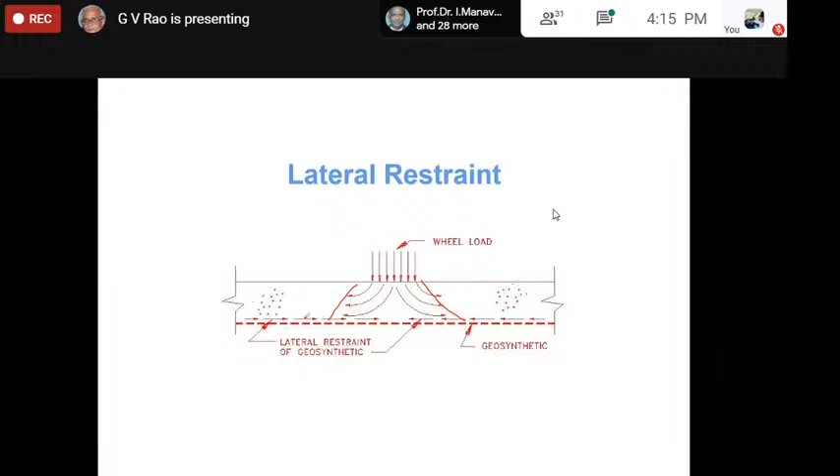It will generate a friction actually. So by generating friction, it's like the other way around. It's giving a lateral restraint on the system now. That is most important.

That means the soil which is made, some granular soil, is being confined to this area just below the foundation or the load, as the matter was. So that load, whatever compressive load is reached, now by virtue of the friction at the interface. So that is the cause for all our efforts.

Basically, we know that we are all dealing with compressive force only, but then by virtue of the attempted movement of the particles over the geosynthetic, naturally we are going to spread, we are going to cause a tension in the material. So this tension is going to cause lateral restraint. Otherwise, tension is not in the structure — it's all compressive loads only. So please remember that.

And also along the plane of the material, there's a drainage function. Of course, if it's a strong geotextile, like a woven geotextile or a geogrid—we'll see more of geogrids later—it's going to give us much more lateral restraint. So this is the first hypothesis placed before us to understand in what manner the geosynthetic is going to work.

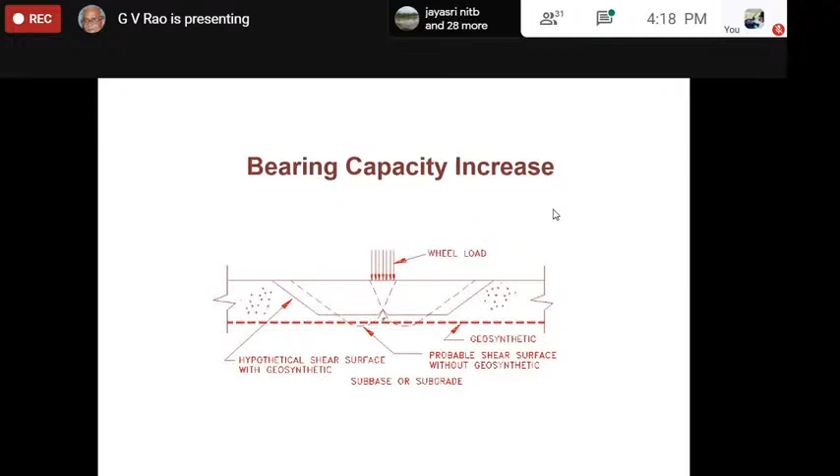And if by any chance there is more sinking also—the advantage of all of this is, well, in a pavement there's rutting, but here we're not talking about rutting. Earlier we just thought we had this kind of system. So if this is going to cause, let's say, settlement, which is naturally happening if the material itself is initially not capable of handling it, then by the process of having this curved shape, what's going to happen now?

The geosynthetic is going to expand, is going to extend. And once it extends, the actual strength of the geosynthetic comes into picture—its vertical component is going to act. This vertical component, which I am showing you, is going to resist the load. So this vertical component resisting the load means the pressure beneath the geosynthetic is going to reduce. That is a great thing.

Now this can happen if it's a pavement under two wheels, or if you have individual footings in a neighborhood—the entire thing is going to act as a membrane. That means between one column and another column, it will act like a tension member. That is the beauty of it.

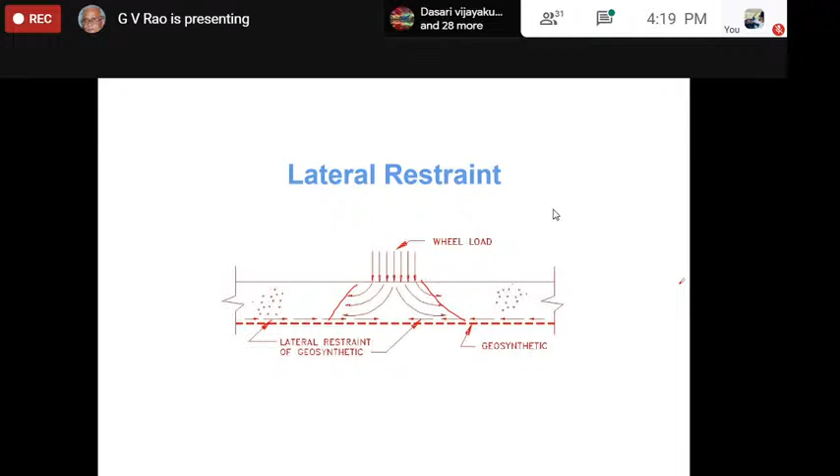Now, these are the three hypotheses which have been given out over many years, and these are hypotheses to understand this better. It's not possible for us to actually develop equations for this—there is no solution by these concepts alone. It helps us; that's why these are called the three fundamental hypotheses for why this strength increases.

Once that is there, what's going to happen? This embankment tends to move, and resistance is going to be there at the bottom. That is countered by placement of geosynthetic here. So the geosynthetic resists this movement, and this has been used well because the footing is subject to outward stress, and an inward stress is going to develop by virtue of the geosynthetic, and by the process of friction, as we thought in a normal case—like Vesic's case. I showed you Vesic's case earlier for how we considered bearing capacity of a rough foundation. So here, if you've got a grid, this is going to be taken as a very rough foundation.

So what's going to happen now? Our earlier bearing capacity factor NC was only 5.14, as I mentioned earlier. Now this keeps increasing. So that is the main thing which is going to happen now: the bearing capacity factor is going to increase.

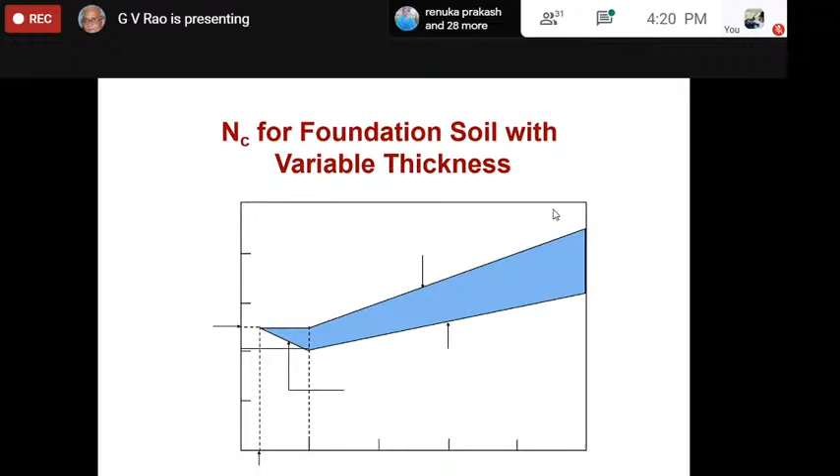This side is the bearing capacity factor now, and you can see that there is a continuous increase in the bearing capacity factors depending upon the shape, size and everything else. So by this process, we are going to think now.

We are not talking only of normal building foundations. I am talking of general foundation cases which are feasible to take up for ground improvement, without necessarily a change in the settlement. That's the first thing we are going to look at.

So once you look at that, what's going to happen if you start constructing very fast? The bearing capacity, the factor of safety against failure, is going to be obviously decreasing.

Initially it could be more than 1. It will keep decreasing - this is hypothetically shown - but it decreases to 1 and it fails also. And just before failure, if you stop it, what's going to happen now?

Naturally, the excess water pressure generated in the soft subsoil is going to slowly dissipate, maybe by virtue of a sand layer here or much below this. And what's going to happen? When the excess water pressure is dissipated, the soil itself is going to become stronger, so its value of strength is going to improve.

So what's likely to happen is the safety factor is likely to increase. On the other hand, if you place geosynthetic at the interface between embankment and soft soil, the factor of safety is not going to come down below 1. It will come down because the pore pressure has been generated, but then it will always remain more than 1.

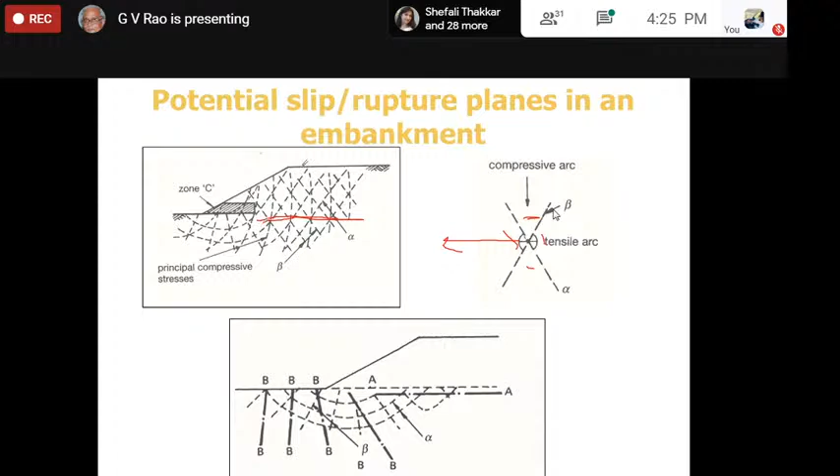So fundamentally, placing a reinforcement below at the interface horizontally is always going to help us a lot, as shown here. Then once the edge comes, these planes are going to move vertically, so we need reinforcement placed vertically. It's always possible to put a pile or something vertically, no worry at all, but you can't place it horizontally - this can only be done before construction.

We can also do this in cases where no technology was used but there's a failure we didn't anticipate. In India, we put a lot of ballies, poles, pipes, and they stabilize things. Fundamentally, away from the toe of the embankment we need reinforcement more or less vertically, and at the interface of the soft soil and embankment we need horizontal reinforcement. That is the most ideal state by theory also, and that is what we are trying to do.

So we can see some examples of a geogrid and how it functions. A lot of workers have done work on this, quite a bit of work. Professor Madhav has shown you work by Binquet, which essentially used metallic strips. Professor Das and his co-workers have done extensive work on placement of geogrids and how it influences bearing capacity. In all cases, the bearing capacity improves.

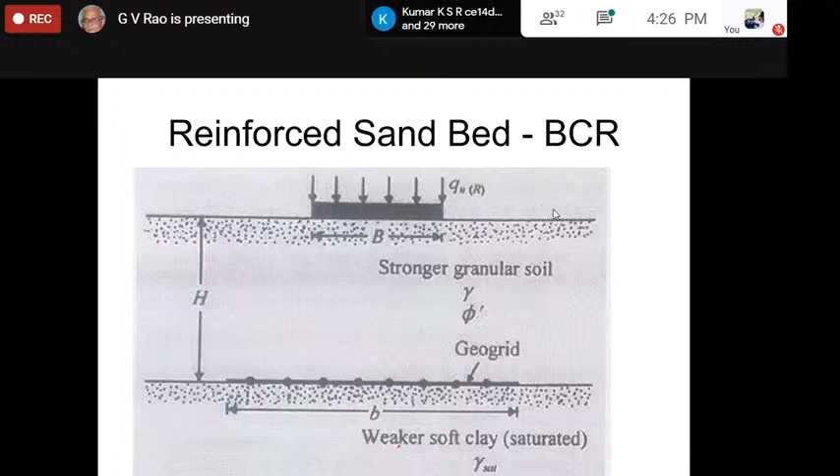We are not touching upon settlement here - if you want to consider settlement, there's a different way, we'll see that a bit later. So what happens in this case: we can place geosynthetic as a first level at the interface between soft soil and the stronger granular soil, which is the usual fashion, and by this placement a lot of theories can be worked out exactly like our classical theories.

What you find is that the zone of failure in the stronger granular layer is normally going to go like this. Once you place this geosynthetic, or stronger material in general, the zone doesn't necessarily have to be strong now, because of the influence of the stronger granular layer. So how do we make it stronger? Naturally by placement of a geosynthetic at the interface, or within the granular material also - this improves the same material further using a geosynthetic.

Before we go into that, one classic example was done by Professor Lee long ago, almost three decades back. He did a wonderful experiment using triaxial testing in the laboratory - using sand at very low confining pressure, and conducted a triaxial test. On the x-axis we find strain in percentage, on the y-axis the total axial stress, sigma 1. Using normal sand, if you conduct the test, this is the kind of stress-strain curve we got.

On the same kind of sand, at the same density, he used wood waste, wood shavings, the kind our carpenter gets when he wants to plane wood. Those wood chips are very thin, about 0.008 inches in thickness, 0.05 inches in width, and 1 to 3 inches in length. Just 1.2% by weight of this waste material was placed in the sand specimen.

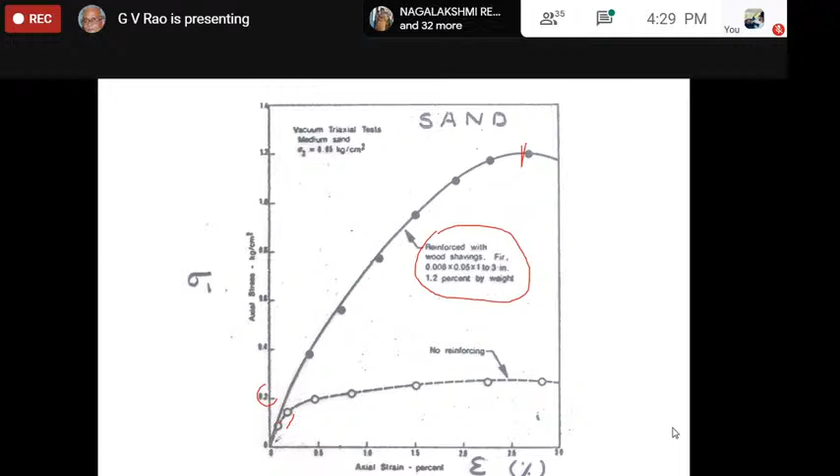And then he got this kind of curve, one of the most wonderful pictures I always remember classically. This picture shows three things. In this case, it is a loose kind of sand, and in this case it behaves almost like a dense sand. The peak value here is almost 1.2 kilograms per centimeter square, whereas here there is no peak at all, it's almost flat, about 0.2. So the increase in strength is 5 to 6 times the peak strength improving. And here it reaches a residual state, while here it's still around the peak only. And the slope, the stiffness of this, is also improved. So three things happen: the peak strength is definitely higher, the residual strength is much higher than the peak of the unreinforced material, and the initial slope, the elastic modulus, is much higher in a reinforced system.

And by using any kind of material, it can be this kind of waste, any kind of waste. And mind you, when we place the waste, it actually becomes a kind of isotropic behavior, because we are placing everything differently.

On the other hand, our students at IIT long ago did a lot of project work on this subject. In this case, we took local sand and tests were done at a smaller scale, 37 mm diameter samples and later 100 mm diameter specimens. We placed discs the same diameter as the specimen, up to 8 of them, and tested at many confining pressures.

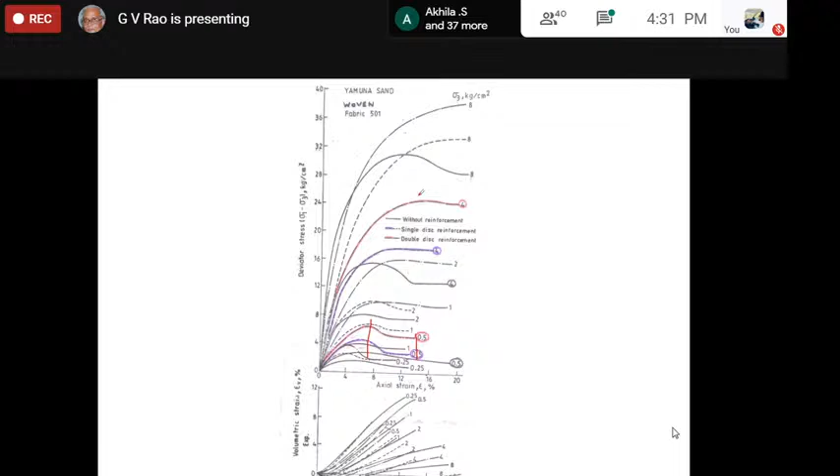If you keep on adding, the initial effect is always more. That means placement of one or two is going to be more effective than placement of a number of them. A lot of results must have been shown by Professor Madhav also to you, about where to place it. If you place this adjacent, very near the foundation, naturally the effect is much more. So when you try to summarize all the results in this case, this is a very interesting picture.

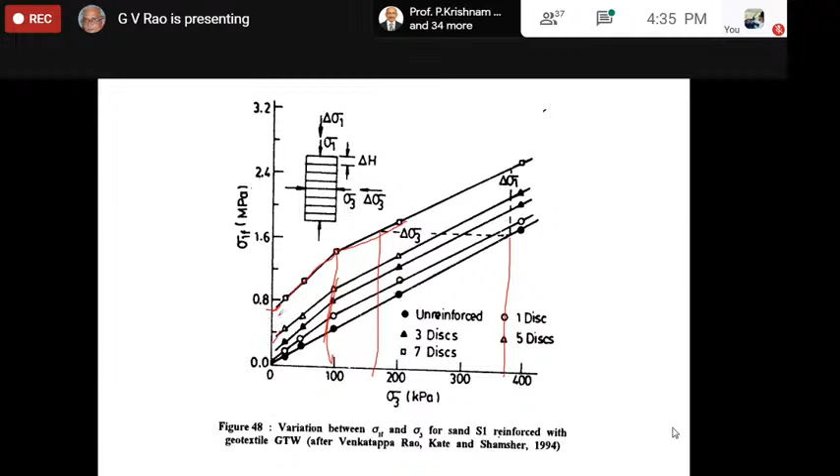A lot of our students have done this work, and we have published many papers on it. For any case you pick, this is what happens with geotextile, geogrid, or with small cut pieces of material - all of them show the same behavior. Similar work has been done with micro mesh also, where we take geonet and cut it into pieces of different lengths. The same general behavior forms.

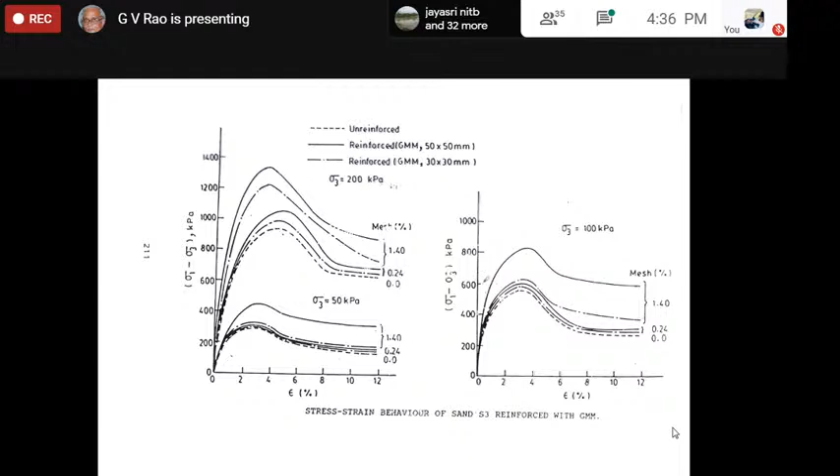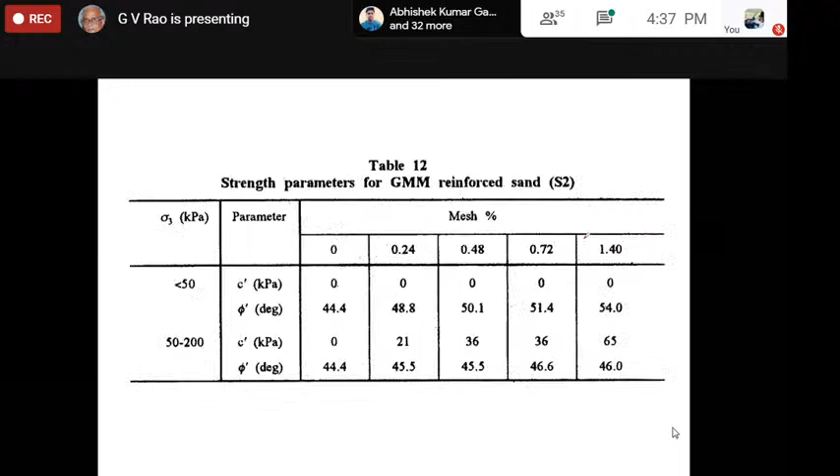So both are different in the direction now. It's all based upon what you define as critical confinement pressure. This is just to illustrate the phenomena. A lot of results are published, and then we asked, what is the use of publishing all this information unless it's related to actual conditions.

So we took some theoretical models in which we said, okay, we have a clay of known strength, and then we put a foundation of width B, at a depth df, and a sand layer of thickness h, and this is what we replace. In this case, it's normal sand compared to the geogrid micro mesh reinforced sand.

So if you try to look at that and compare the bearing capacity values obtained by bilinear theory, by double layer theory, we can calculate the bearing capacity of this reinforced bed, and also calculate the bearing capacity without reinforcement, that means just sand only. If you put a ratio of these two, bearing capacity with reinforcement to bearing capacity without reinforcement, we find that for a mesh of 1.4%, this value is increasing significantly.

Obviously, the higher the h, that means if h is more than 2b, the influence is very high. And if h is less, naturally the influence is not much. If the percentage of this mesh is 0.24%, the value is almost 1.5, this is 3. So the point is, even at a very small percentage, 0.24%, we find improvement of the order of 2 to 3, and maximum is around 3.

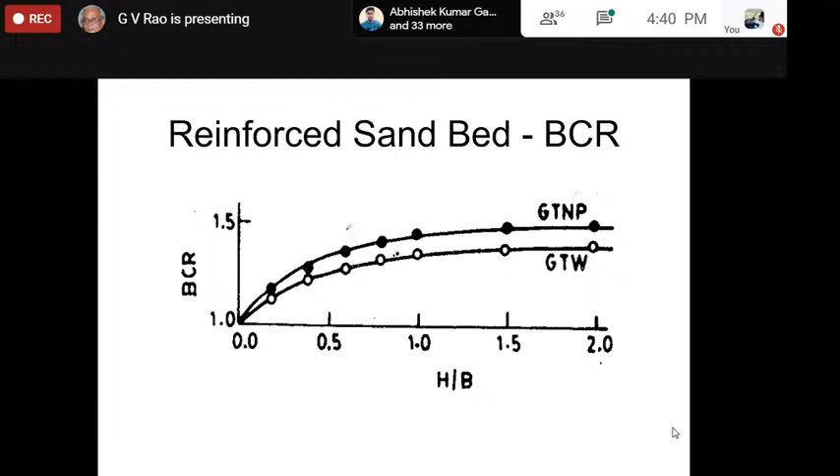That is the kind of thing you would suspect. Whatever you place will always improve like this. There are different kinds of calculations we have done based upon actual results. Earlier, we placed non-reinforced style and reinforced style, and compared them with respect to experiments and with respect to theory. All these studies were done and published very well.

Another way we try to calculate is using a granular trench, using the theory initially initiated by Professor Madhav long back. We use the same model, but now instead of only granular material, we have a reinforced granular material, like an interaction test, placed in weak clay. We find the bearing capacity ratio on this side, and H over B, where H is the diameter of the granular trench, and B is the width of the foundation or load area. H more means H over B is more, up to 2.

So then we also calculate what is the likely settlement of this. We did all this now. Settlement is not going to change significantly. So once you do the settlement also, we find that actually the settlement does decrease from this value to this value, but definitely not as much as one would expect. It's not as dramatic as expected.

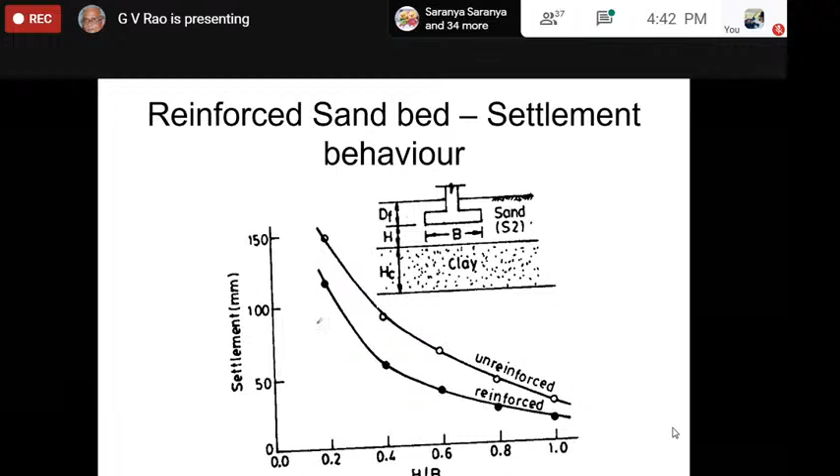For a given case, let us say the settlement reduction is hardly 15-20 millimeters in a range of 150 millimeters. Here also it is decreasing slightly when H is going to be more, because domination is done by the H reinforced here. And we calculate like this for other materials also. In this case, again, we got a different kind of sand, and we find slightly more difference. But definitely it's not decreasing from 150 to 50. It's always going to be a very small percentage settlement.

So what we want to say out of all these calculations, made based on the fundamental parameters of the clay, based upon the frictional values of the whole thing, and based upon the theory used to calculate bearing capacity, we find that it does influence the bearing capacity by at least 2 up to 3 times, depending upon many factors. And then the settlement, calculated conventionally, is not influenced so much; not very much influence is there. It's also shown by a lot of work done by Professor Madhav himself.

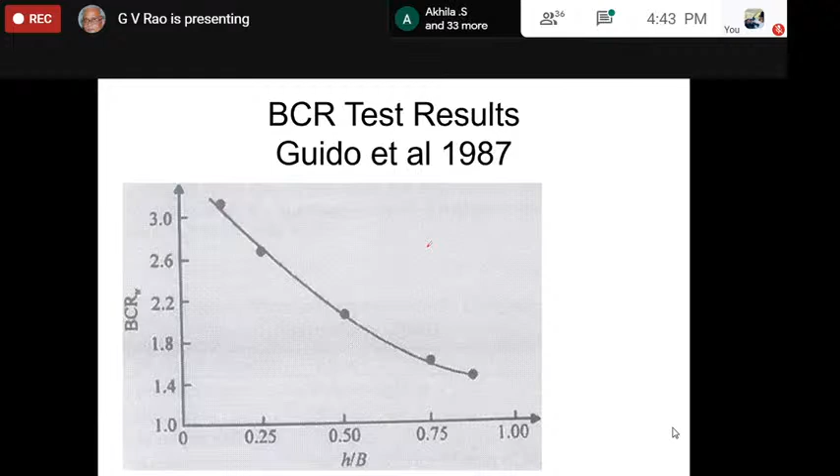And the work by Guido et al 87, also shows similar kind of results. It all depends upon the kind of sand, the kind of clay you have, the kind of GeoGrid you have. So the influence is very significant in trying to change the bearing capacity. This is definitely taken for granted.

So different kinds of geogrids again. Influence is more with SS1, a higher, stronger geogrid. Influence is less with a weaker geogrid. So these are all classical results I am trying to show you, along with our own students' work.

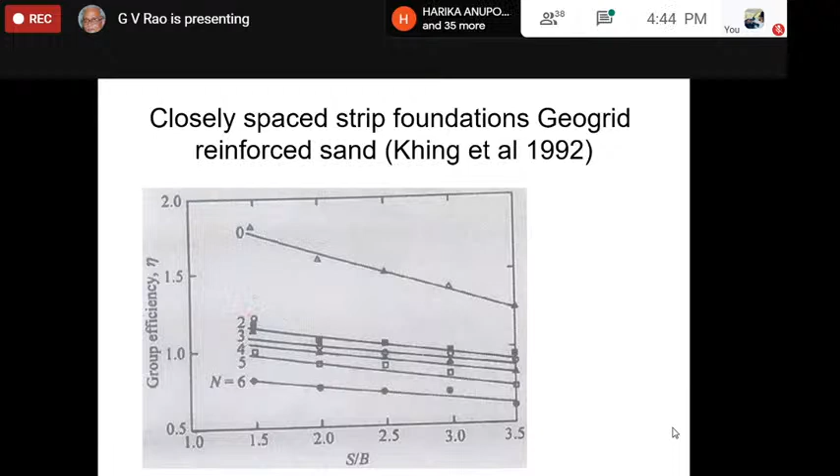So when they close the spacing, which I showed earlier, you find the group efficiency of many of them - we find that when n is equal to 6, the influence is felt less. Efficiency comes down. So by placing them so closely, so many of them, it's not going to influence it so much. And that is what you have to always keep in mind: just because you like having more of them, doesn't mean the benefit is going to be as much.

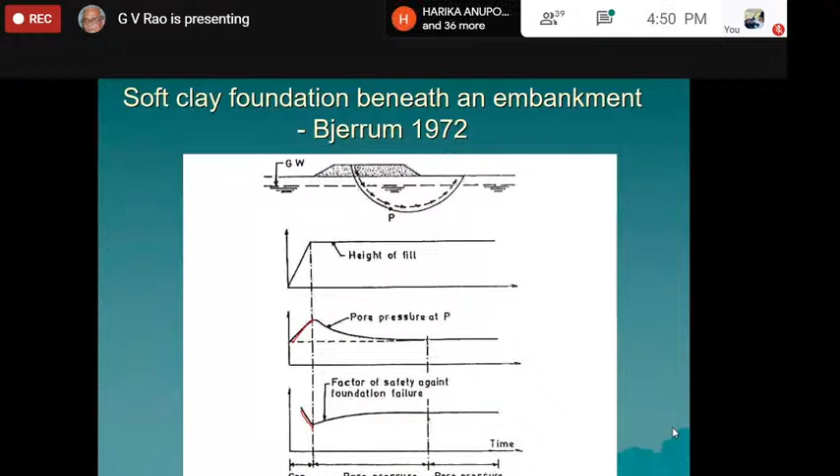Once you stop, slowly the pore pressure dissipates, so the factor of safety increases. That means you have to do slow construction. Slow construction gives time for pore pressure to dissipate, but this slows down the whole construction process. We can't afford that to happen, so we place a geosynthetic.

Now, if you construct very fast, the embankment is going to settle, or tend to fail. What are the conventional ways in which you can address this? You can improve the ground.

One way is you can mix some lime. A lot of reports are available in the literature; we have done one such study, published by the Indore Congress in the year 2000. Then we can use stone columns, which I'm sure has been covered by Professor Madhav. And then consolidation with sand drains, which must also have been covered, but these sand drains have their difficulties.

We can also use a geosynthetic prefabricated vertical drain, which functions exactly like a sand drain and performs well, accelerating consolidation under loading. So PVDs are part of geosynthetic materials, using the functions of both filtration and drainage. But we don't have time to deal with it now, we'll cover something else.

Another way to enable fast construction is to use reinforcement at the interface, which we call basal reinforcement. What are we trying to do? We are trying to achieve bearing capacity improvement, not addressing settlement. The structure must be able to tolerate some settlement. That's why we don't call it foundation improvement, we always call it bearing capacity improvement.

So we'll look at what the problem is, how we analyze and design, and what the requirements of the geosynthetics are, along with typical case studies. It is always a geotechnical problem. Geosynthetics aid the civil engineer, but we must still follow all the fundamentals of geotechnical engineering before going to the next step.

This is exactly what we want to prevent. Construction of embankments on soft ground can lead to deep-seated foundation failure or excessive settlements. We're not talking about settlements here, we're talking about how to prevent these kinds of failures, deep-seated or shallow, we want to prevent them.

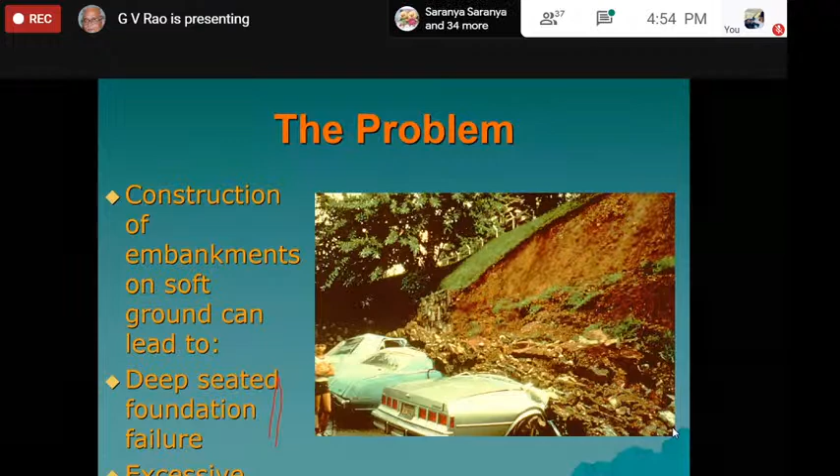This is an excellent illustration, provided by the International Geosynthetics Society, showing the whole embankment coming down, and the adjacent soil actually going up and then falling. This is a very classical failure.

The solution to this problem can be approached in many ways. Conventionally, we can think of removing the soft material and replacing it with quality fill. Obviously, this practice was possible maybe a decade or two back. Today, where do we put the soil? We have to carry this soil away, and where is better soil available? We are not being allowed to pick up soil indiscriminately.

There is a lot of control by environmental authorities to not open more quarries and not to transport these materials. So the question of removal and replacement is not going to happen, nor displacement of soft material.

Earlier we used to have some kind of blasting technique, by which the soft soil would naturally jump out, but that causes a lot of other issues, again pollution and things like this. So that is again not a feasible practice today. Piling, obviously, can be done, but that is likely to be more expensive.

Then there's stage construction, meaning you construct a meter or so, allow some time for the pore pressure to dissipate, and then keep doing it. If we want to consider 10 meters of height, it will take 10 months also, or maybe more. So stage construction is not feasible in today's environment, both socially and politically.

Everybody wants to finish structures as fast as possible, so you can use the road, building, structure, or bridge. Then we can have a toe berm. In the case I illustrated, there's no space to construct it because we can't acquire as much land as needed, since a toe berm requires additional land. Normally the land acquisition has taken place beforehand only, so today if we say for safety's sake we want more berm, where is the land available? That also is an issue.

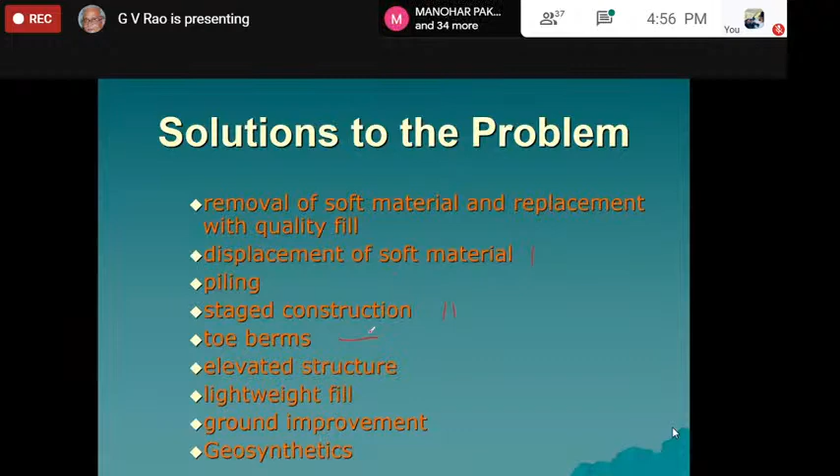Then of course there's the elevated structure. This is a good option in one way, like our bullet train, because of the soil and rock conditions, they decided the entire 550 kilometer length is going to be elevated only, viaduct only. Obviously, the cost of the entire structure is 4 to 5 times that of a constructed embankment. So look at the kind of situation they're going to face now. Elevated structure is a very good option, piling is a very good option, but these will definitely add cost, not necessarily cost effective.

The other option could be lightweight fill, meaning we remove the soil and replace it partly with lightweight material like polystyrene blocks, thermocol blocks, which are available now, and part of the fill is also constructed normally. In India, we have not started doing this, and abroad it also has not commonly been done. Yes, some trials have been made and they're successful, but with the prevalence of rodents and things like this, we are not very sure whether this will work in our country or not.

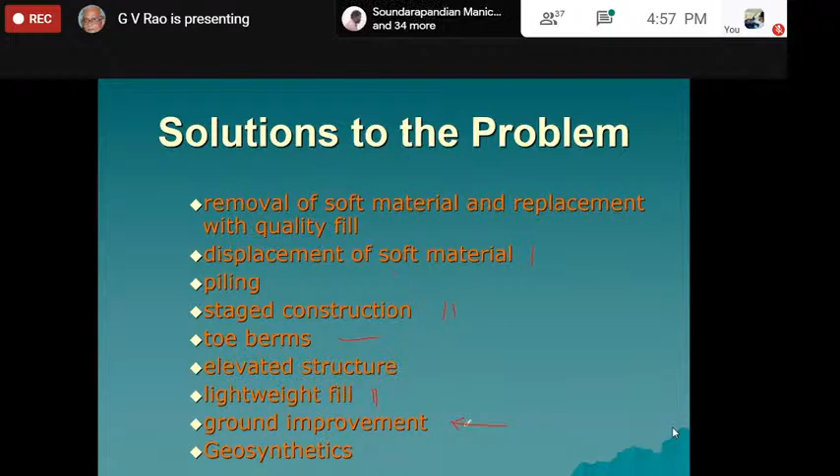Then there's ground improvement. What kind of ground improvement can you do? Because the soil involved is going to be very deep, very thick. So something like a stone column can be done, definitely a very good alternative. Again, in the case I am considering, stones are not available nearby and they are not cheap either, so availability of stones is an issue. And PVDs, as I told you, will take more time.

So the other alternative which can be thought of is the geosynthetic alternative. What I'm trying to say is that the engineer or designer in charge has to look at all the options. For example, the possible options here are piling, toe berm, stage construction, some kind of ground improvement, or geosynthetics. Out of these four feasible options, naturally you have to do some preliminary design, work out the costing, and then decide what is best.

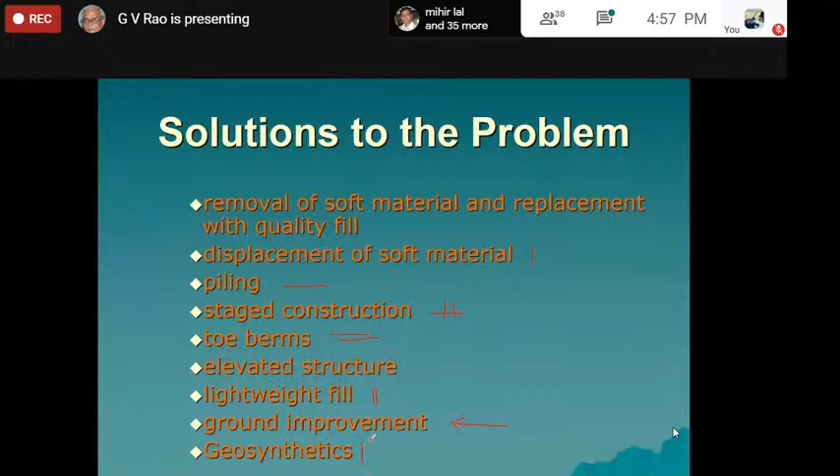So just because we succeed in doing a geosynthetic reinforced embankment, it doesn't mean that it's always going to be the right answer, always going to be correct. Geosynthetics in this case generally provided a structurally sound solution at lower cost and definitely faster than traditional methods.

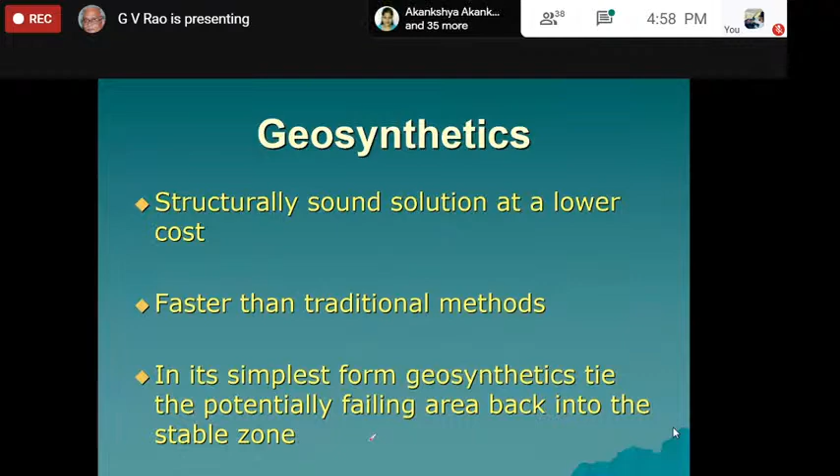In a way, what happens is that if the soft soil is trying to move away, it is being held together and held back underneath the embankment. That is the beauty of the entire thing. The block is being held back now. So typically it's something like this.

So we have an embankment, as shown in the diagram. We can place a number of these layers, or just one layer at the interface, or one or two below in the soft soil, or also in the embankment. It's up to you. Then we can do the same kind of stability analysis.

You would have found out the stability of the slope earlier and found that the factor of safety is less than normally 1.25 or 1.3 as desired, in which case you can place one or more layers of the geosynthetic and recalculate. Study the factor of safety with typical failure conditions, and by a number of trials arrive at the minimum factor of safety.

So in all these cases, we'll see what conditions you have to check, but there is always a slope stability analysis done. In the simplest way, what is happening here?

If this entire block is going to come out, naturally the geogrid or geosynthetic here will also be pulled out. So if it has got that much resistance between the geosynthetic and the soil, that is going to prevent it from coming out. That means it's going to give you additional tension load, which will be added to the analysis.

Most of the software are capable of doing this kind of function. We have ReSSA, which is available. We have SLOPE/W. Many softwares allow you to do this kind of work.

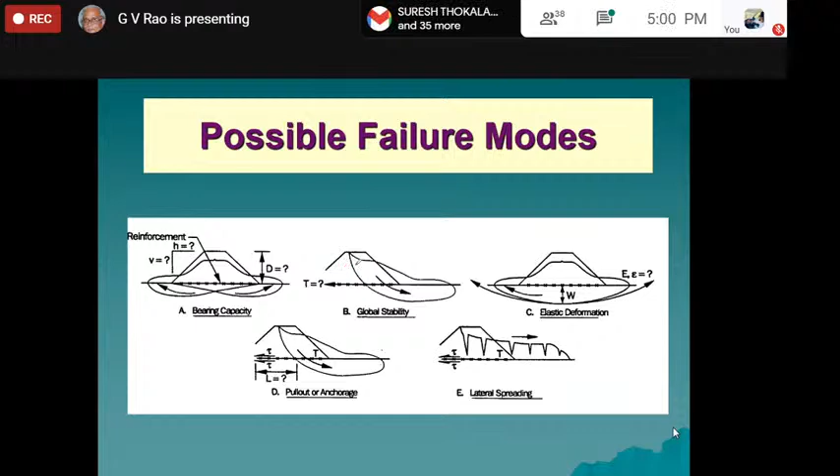I have shown you this already. So the kind of things we are going to do will be analyze bearing capacity, analyze global stability, analyze deformation, pull out anchorage, and lateral spreading. All of them we had analyzed. These are going to be exactly the same analysis you would do for a normal embankment on soft soil.

Mind you, not replacing soil - we have seen this. One important thing before we go further is that in this case, the embankment is going to fail across the embankment, not along it. So you see in this case, the reinforcement is placed across it.

That's why the unrolling is done in that direction. So the geosynthetic we place should have more strength in this lateral or cross direction, and not in the longitudinal direction. That means if it's a geogrid, it's going to be a uniaxial kind of geogrid and not biaxial. The high tensile strength is required to maintain stability and prevent failure.

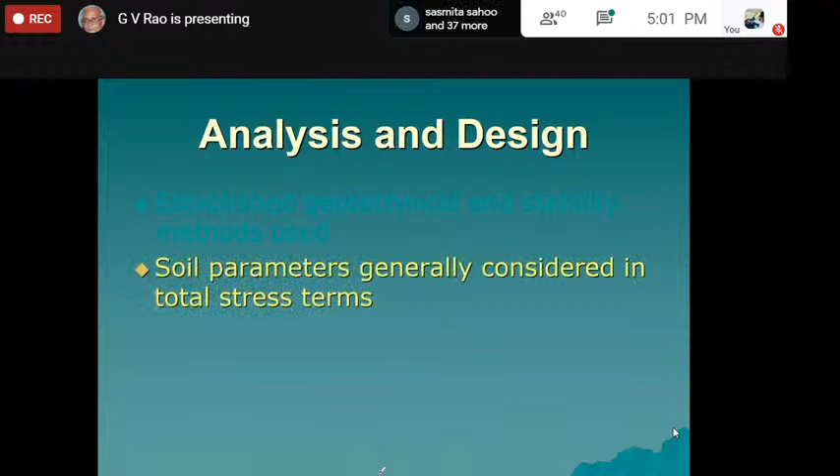As the foundation shear stress or strength is increased, the required geosynthetic tensile force reduces, which is good for us. The analysis is as mentioned, by the traditional methods only. For soil parameters, we initially always consider total stress parameters. So we analyze for rotational stability, lateral sliding, and bearing capacity.

When trying to do this, as I already mentioned, you can see a typical embankment, and we understand the nature of the soft soil - some parameters. We also know what the soil parameters are for the embankment. One more thing we have to be clear about is that usually when constructing, contractors take the soil from the neighborhood only and dump it here.

So if the contractor takes the soil from around here and dumps it, naturally that becomes a ditch during monsoon. So the height of this embankment is not going to be this much alone - the effective depth is also going to increase to this level. This is what we have to watch for.

You remember whenever you travel by train in monsoon, on either side of the track we have ditches parallel to the track. These are ditches created during construction only. So one has to avoid this.

Once this entire block is supposed to move, or by our analysis of stability, what's going to happen?

It is going to be the tension along this geosynthetic which is going to come into picture now, and we have ways of determining the friction developed here. The tension is going to act normal to this, and we take the component along and tangential to the assumed failure surface. So all of this is exactly the same thing now.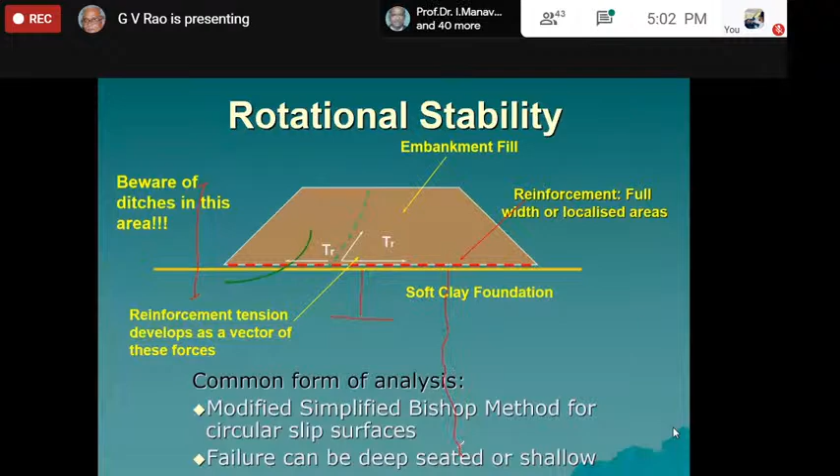We can use basically the modified Bishop's method, simplified method for circular slip surfaces, and there are two ways to handle this. One way is that the thickness of the soft soil is limited. Another case is that the thickness is quite large. So the basic theory applies in both cases, but there's a slight difference in analysis.

What may happen is that blocks at the toe edge may start slipping away. If they are slipping away, what is preventing it? It is only the friction, the interface friction between the geosynthetic and the embankment soil, which is going to prevent this. The active pressure is going to act upon this, causing it to move away.

The friction is the cause for the tension being created, so naturally it is this resistance which is taken into consideration. For friction, we need to conduct a laboratory test to find out the pull-out value and modified shear value, and then see appropriately what results. Ultimately, we are calculating the tensile strength, the active pressure, and then seeing whether the friction is sufficient to prevent the outward lateral movement.

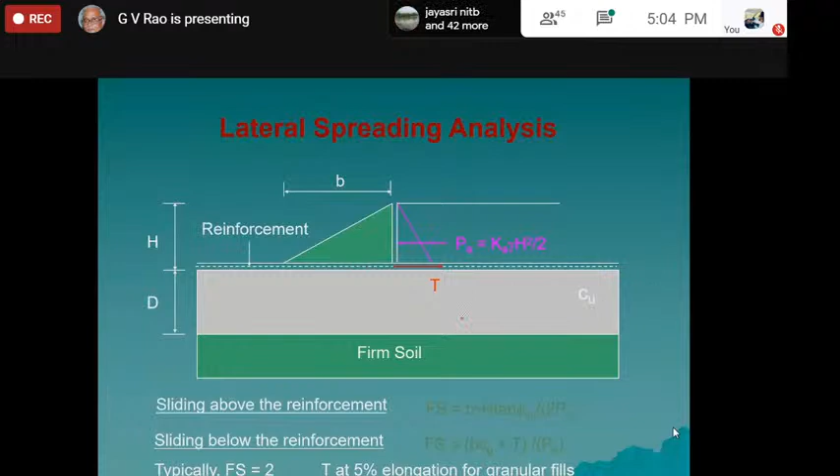The other critical thing in the case of relatively small thickness compared to the width of the embankment - assuming this is a small thickness compared to the base - is that it's possible for this entire thing to be squeezed out.

How to prevent this squeezing out is by considering a block. This block is going to move out again by virtue of the pressure acting upon it. So we consider the friction between the clay and the bottom of the geosynthetic, and the friction between this clay and the firm soil below.

That is why we are trying to minimize the sliding, and naturally in this entire process there will be tension developed. That means the tension developed should be within the limits of the vertical strain that are allowed. That also is important, and that is another way of looking at this.

It's called boundary extrusion - loosely speaking, the friction here is allowing this block to stay in place. In a loose way, we say the block is not being allowed to move, it's being tied back to the bottom of the embankment. That's called extrusion prevention. It's a beautiful concept developed by the Tensar Corporation, based on their theoretical work and a lot of field studies.

We have ways of analyzing the stress distribution resulting from all these forces. Once a geosynthetic is placed, and geocells also, the stress distribution is going to change. That change in stress distribution, because we reinforce the entire area, is detailed in the British code, which we followed in the case study as we go further.

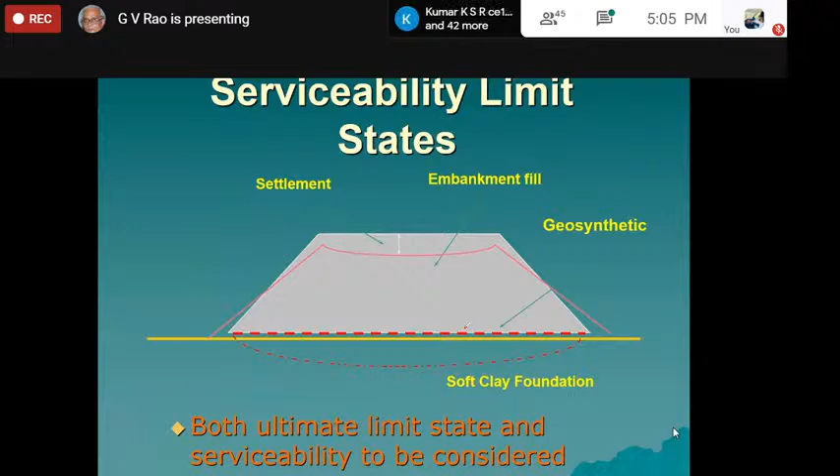Then, of course, there's the serviceability limit - we need to consider how much settlement will occur and whether it can be allowed. Obviously, this is a question the client has to address. When we provide these designs, we are not controlling the settlement; we calculate settlement in the usual way and indicate to the client what is going to happen.

So the requirements of the geosynthetic can definitely include high tensile strength in the roll direction, ability to carry load for several years - since consolidation is still going on - and ability to transfer load from soil to geosynthetic by friction if it's a geotextile, or by interlock if it's a geogrid.

So these are two things that are going to be there. And then, of course, it should not be damaged during construction. So that also we have to consider in determining the allowable tensile strength of the material. And then during construction, obviously, it should not be exposed too long. Sometimes there are construction issues between the client and contractor, and if it is exposed too long, there is a problem of degradation of the geosynthetic also. So in that case you have to protect it. That's all what we have to do.

And the materials we are looking at are going to be either high density polyethylene or, of course, polyester. And in both cases, naturally, these are not degradable from a biological viewpoint. So that is what we have to keep in mind.

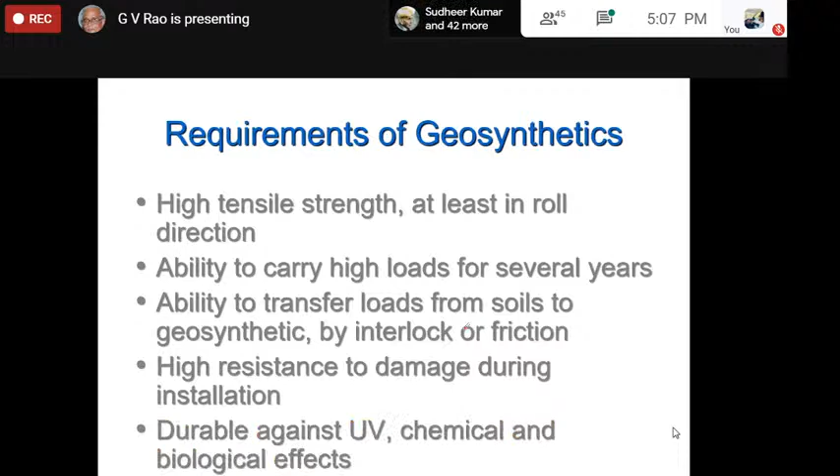And extruded grids, which I am going to show in a big way. And then there are also welded grids that are possible. So these are what is there in this case.

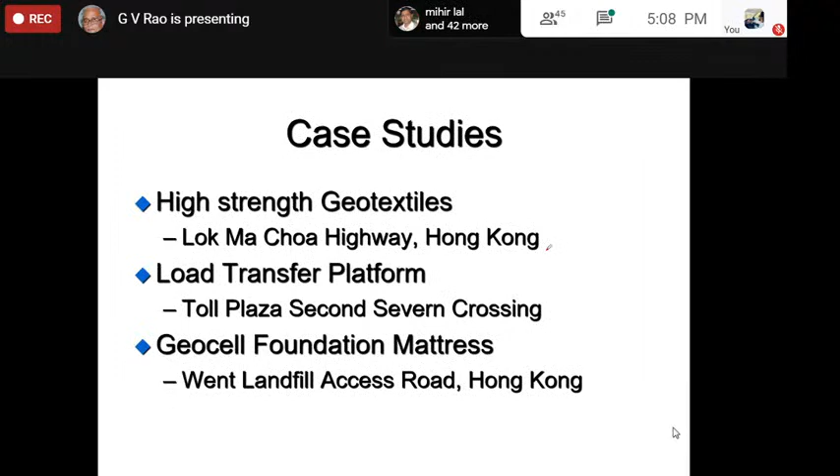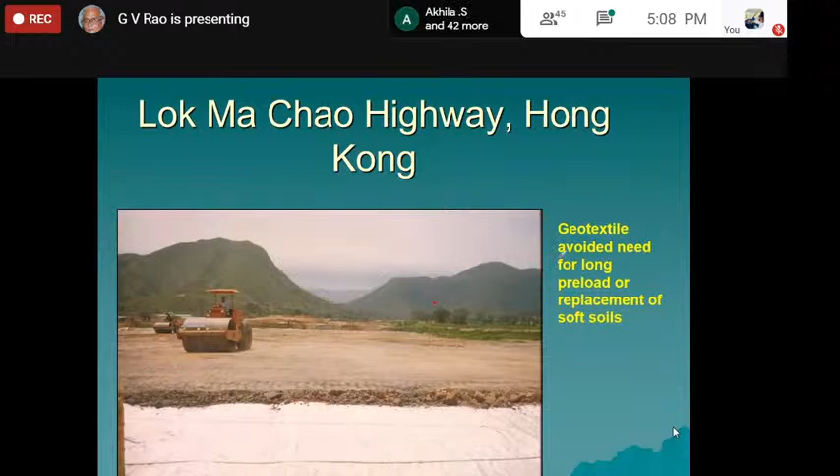So the first experience outside the country, long back, maybe 2-3 decades back, was an embankment constructed over swamps and fish ponds, soft clay foundations, 10 meters deep, with strength as low as 3 kilopascals. Mind you this: the thickness is 10 meters and the strength could be, in some locations, as low as 3 kilopascals. So in this case, we place a geotextile here and avoid the need for long preload or replacement of soils. And they have driven band drains before placement of that.

PVDs have driven actually before placement of that, and so that way they also measure the settlement, pore pressure, and lateral displacements, and this allowed them to do it faster. But we know very well this is very good technology; we need to spend extra time and money also, and allow full consolidation to occur.

So then after that is done, we can always have, obviously in this case, a unidirectional grid placed across the material. So in this case now, the strength of the material is not as poor. The soft soil is 6 meters thick, and the strength of the soil is definitely much better than the earlier one, 10 kilopascals, 20 kilopascals.

So mind you, when the strength is so low, up to 5 kilopascals or 3 kilopascals, naturally they have to resort to PVDs, a drainage system also, because once you start constructing, the soil is so soft there is a squeeze out also - that means you can't construct fast. So to prevent all of this, they used a PVD for some time, and then started constructing using a geotextile as reinforcement.

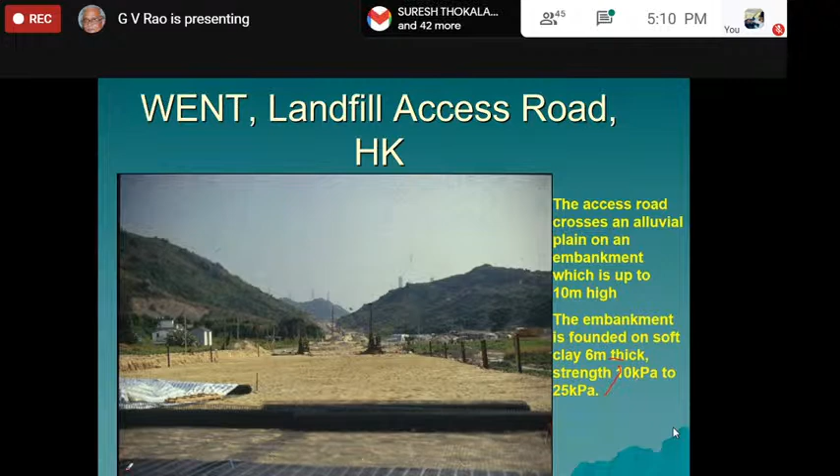But when the strength is definitely slightly higher than the reasonable load - not very low but low - then we can directly start constructing by using a geogrid section. So the geogrids will tell exactly how it is to be done, and whether it is geogrid only or something else. So then the development which took place, originated by the Tensar Corporation, is now part of the British Code.

Now the reports also say that we get a mattress actually - we call it a basal mattress. So this basal mattress can be placed within the soft soil, or can be placed as part of the beginning of the embankment itself. So the provision of the geocell mattress will cause a change in the bearing pressure of the entire embankment on the soft soil.

By this process now, we find that the center portion still has maximum load capacity, and the sides will still be active, but the entire thing is not allowed to move outside. That is what happens now. It becomes that when the soil reaches the plastic condition, the geocell comes into picture.

Normally in a bearing capacity system, hypothetically you calculate the ultimate bearing capacity and divide by a factor of safety to get the allowable or safe bearing capacity. In this case, we can allow the soil to go to ultimate condition, but the improvement comes in making it work only under the safe bearing capacity because of the presence of the geocell mattress, or earlier geogrids. Let us see what this really means by an actual example.

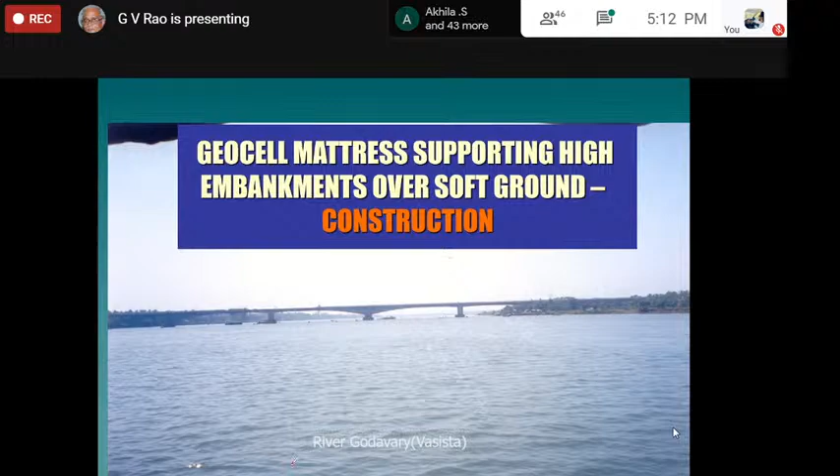The sea, obviously Bay of Bengal, is about 5-6 kilometers away, and the water is definitely salt. Looking towards Vijayawada side, the road goes to Vijayawada, and this side goes to Rajahmundry. The bridge proper is going to be 1200 meters long, and we'll try to see the rest of the conditions, though they're not so important.

The approaches on the Vijayawada side have an approach embankment height of 10.5 meters, and on the other side, the Dindi side, it is 12 meters. The strength of the soil is definitely quite low for taking up this 10 to 12 meter high embankment.

The C value here is only 17.5. And here it is sometimes up to 12 only, and maybe 30 here, maybe 21 here. The angle of friction is also very small.

Mind you, this entire thing is actually black cotton soil up to 22 meters. So on such low strength material, we are going to construct an embankment of 10 to 12 meters. One funny thing is, this is not continuously only black soil. There are also lenses of sand available now. The sand could be at this depth in this borehole, and in another borehole, the sand could be somewhere else. They are not connected sand layers.

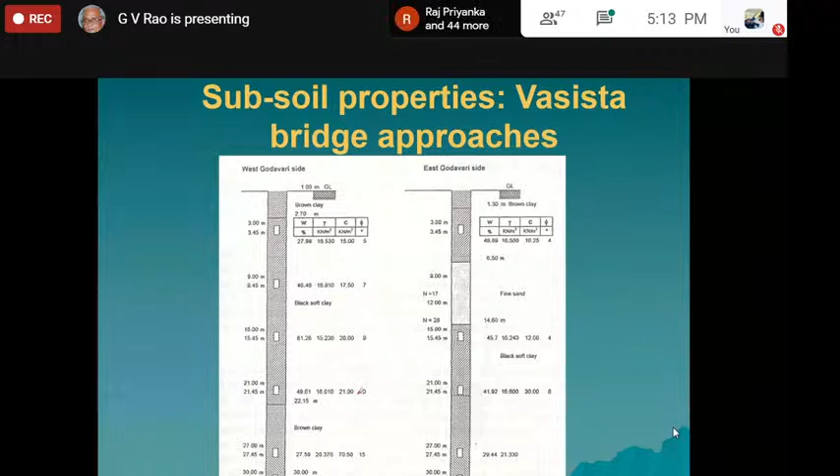So that is what we have to keep in mind. Some support was probably coming from the sand, but since they are not continuous, there is no drainage capacity for them because there are no connected lenses. So it is 22 meters of soft clay, black cotton soil kind of soil, with very low strength, and on which we want to construct a high embankment.

As I said, given the high thickness of black cotton soil, the embankment maximum is 12.4 meters high. So we decided to go for a basal geocell mattress, and naturally for safety we wanted to have a ledge or berm also, but that much was not possible. So what happens in this case? We have to cut this edge portion and elevate it by constructing a reinforced soil wall. We'll see all that very clearly.

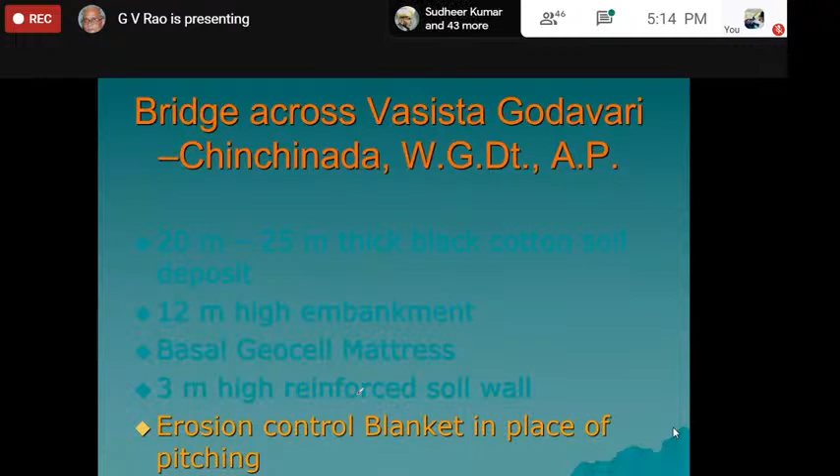Normally, such an embankment requires erosion control blankets, erosion control systems, and pitching was what was thought of in those days. But instead of pitching, which was costing 120 rupees per square meter, we used material called rolled erosion control blanket (RECB), which in those days cost only 40 rupees per square meter. We can see how it actually works.

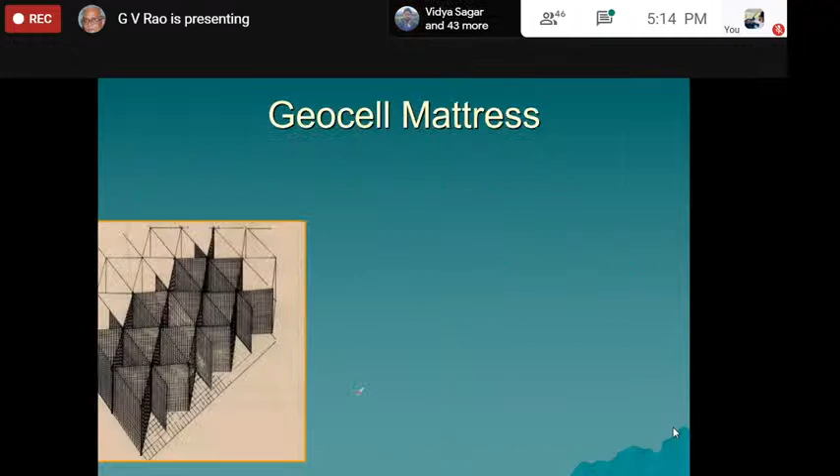So the alternatives are, we already thought of all the alternatives; I will not discuss much on this. The one thing you can see is that the geocells are made in a very different way. Using basically the uniaxial kind of geogrid, instead of placing them directly on the subgrade, we use a biaxial geogrid initially, and then construct the cells using uniaxial geogrids with transverse diaphragms. We'll see how exactly that's done very quickly, and by doing all that, we get triangular cells.

So let us see what is done now. This is the finished structure basically. We'll come back on this again.

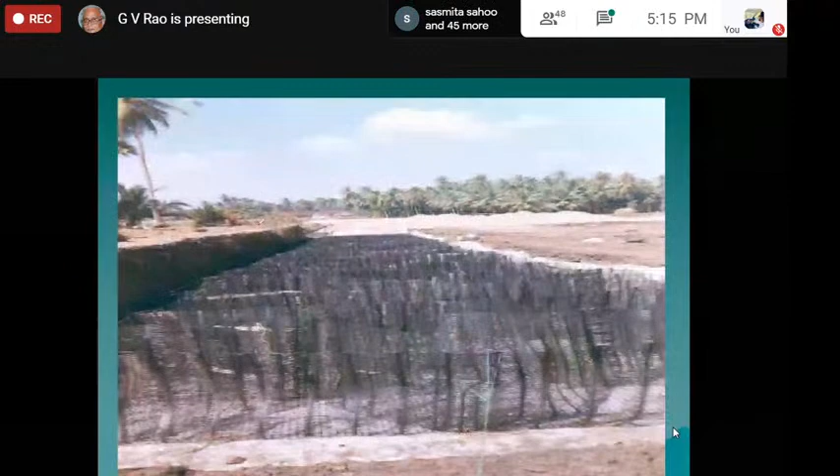We'll start with this. It's very easy to understand. First, we place a geotextile, which acts as a separator. On this, we have a biaxial geogrid. Then we have these geogrids.

These are uniaxial kind of geogrids. They were laced together to the bottom, at regular intervals, and then these were held vertically.

Then a diaphragm is stitched between these things. The diaphragm stitching is done again by lacing, interlacing, and that is done by a Bodkin joint actually.

So what did I show? Initially, this was stitched, laced together by plastic rope, another plastic rope. Then these are appended, made vertical. And the diaphragm comes again in the same form of uniaxial geogrid, but this is tied together by using a Bodkin joint.

Bodkin joint actually is a 100% strength joint. You can see the plan view of this - this is a Bodkin joint. That means a plastic rod or a plastic pipe or plastic strip, very strong. And this joint is 100% efficient, meaning there is no loss of strength at all.

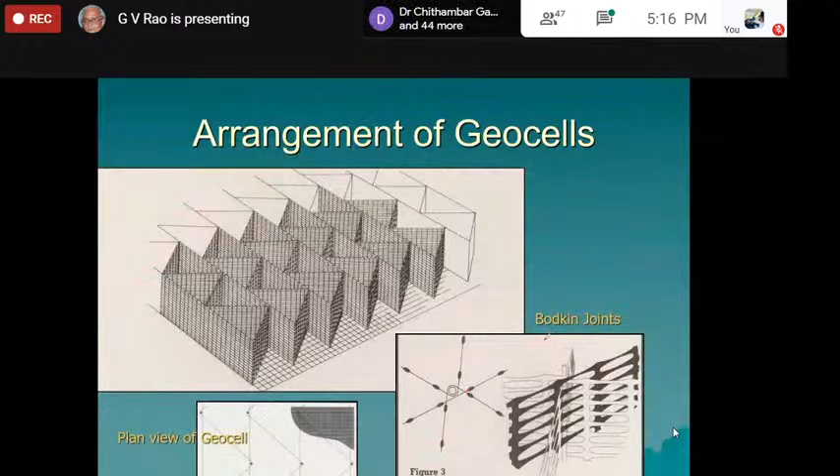So the Bodkin joint was a very simple but effective innovation done by this company, and we are able to construct structures like this. We'll go back to the entire thing, so by using these cells now constructed like this, we'll see what is going to happen.

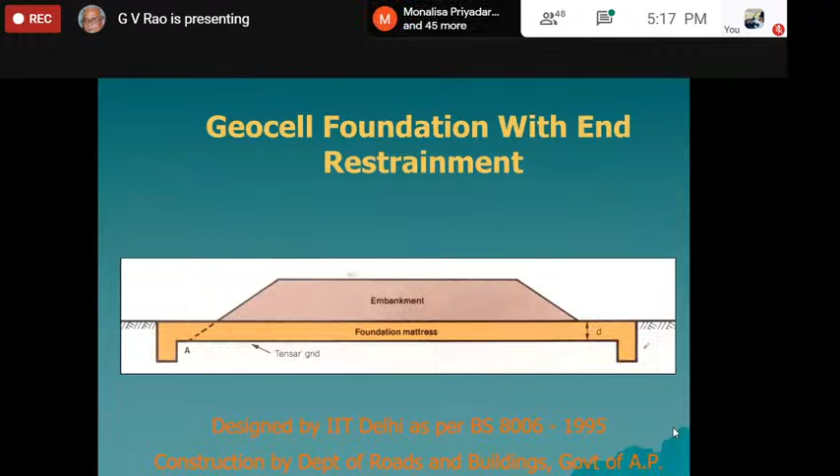In this case, we constructed cells of 1 meter and half meter thickness, as I told you. We need to also have our foundation beyond the edge of the embankment, to prevent extrusion at the edges. For that, we need a special end restraint, meaning we have to construct a deeper foundation than the basic cell. We'll see that also.

In this case, this is 1 meter high diaphragm and 1 meter high geocell. At the edges, we have the end restraint by creating a 1 meter deep and 4 meter wide cell. So these two are end restraints, and this is a regular one.

What I mentioned was this entire embankment should have gone up to this. In the pictures, you'll see that we don't have an inch of land available. This is only a service road. All along here on both sides is going to be an excellent paddy farm, and also a coconut grove basically. So they are not going to give an inch of land, and also the point is it's all black cotton soil.

Water table is at the top now, and paddy cultivation also requires a lot of water anyway. So we have to consider this kind of area, and this section was taken from the standards set up by the then Ministry of Surface Transport. All the slopes and analysis were done as per the conditions which I mentioned.

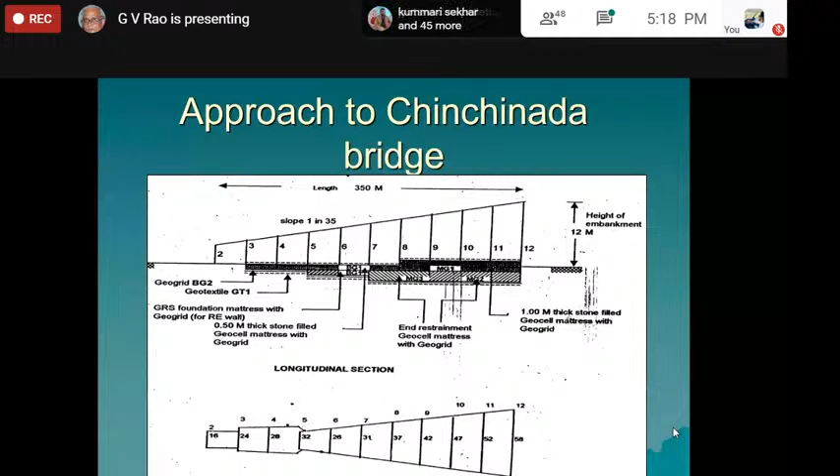This is the initial site. You can see this now. This is where the abutment is going to come. And you can see there are paths which are there now, cattle grazing, there are pipelines below this, and we are going to work on this area.

As I said, there are paddy fields now, coconut groves and things like this. Very difficult to work because it's not a uniform site, labeled for inauguration by Shankustapana by somebody.

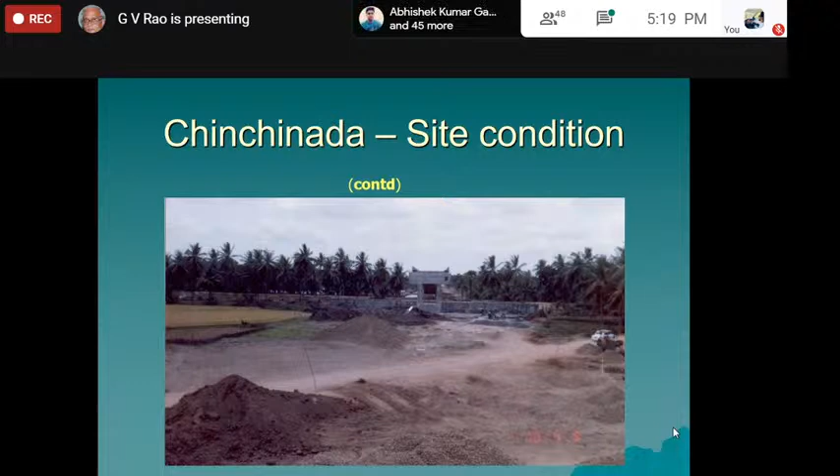So the point is that it is not really the kind of land we expected. We are just going to level it and start constructing, with absolutely no other foundation, and by the small drain they construct a culvert kind of thing. You can see this soil now, really pitch black, and how soft it is, you can imagine.

It's like black gold, actually. So then, of course, it was leveled and the geotextile placed, as I mentioned how to do this. After placement, small vertical members were pulled out, otherwise they would lose tension, so they have to be pre-tensioned. These cells are formed like this now.

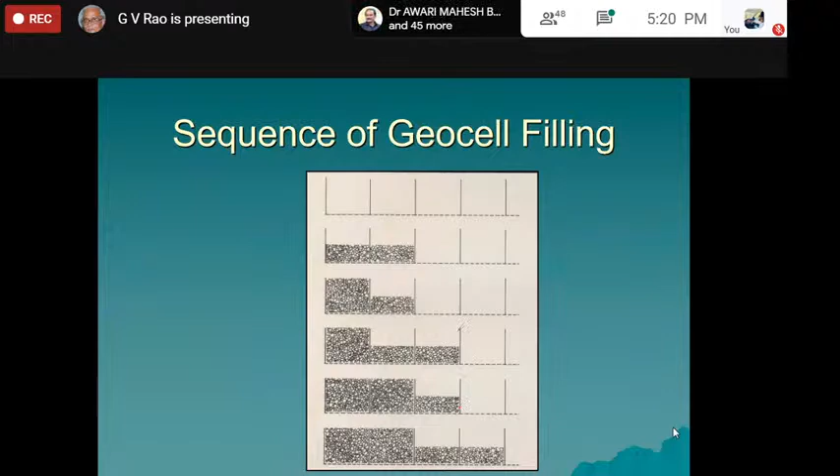Then the question of filling comes in. We can't fill arbitrarily. We start filling the first two cells to equal height, and the first cell is filled up to the top, and by the time that's done, the adjacent one is filled to half, and then slowly we move across. You keep filling the adjacent one to the top and the next to half, so there's a specific way you have to go across, not simply at random, because the tension has to be uniform.

This filling can be done by manual labor or by machines, no worry on that. When placing, to avoid loosening, we place it so that whenever the thickness is 1 meter, we fill up to 110 centimeters, then place the geogrid on this, and it was rolled. After rolling, it comes down to a compact thickness of 100 centimeters, which is the height of the cell. That is what is done.

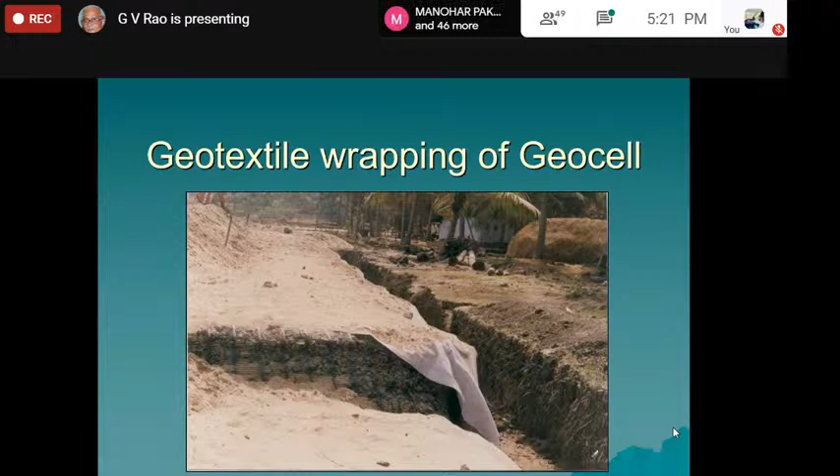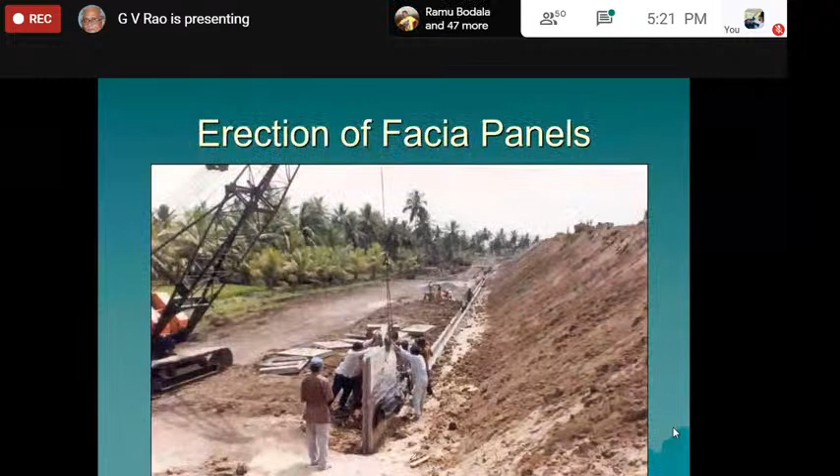When the trench is dug for the wall, you can see it's almost near the surface only, so that's something we have to keep in mind. Then we made the initial concrete trench kind of thing, then the panels for the wall were made and they started erecting them. Then construction proceeds as usual. Mind you, all this is designed ab initio.

This is the first kind of wall or structure placed on such kind of soil. The contractor was not experienced in doing it. He was enthusiastic, but then we had to go and supervise.

I used to come regularly from Delhi, at least every two weeks, once in two weeks, on weekends, naturally accompanied by the engineers, Mr. Jashan Kumar from Hyderabad. We used to travel together to Palakollu, Bhimavaram, and then start traveling. We had to really exert ourselves in order that the structure becomes very strong.

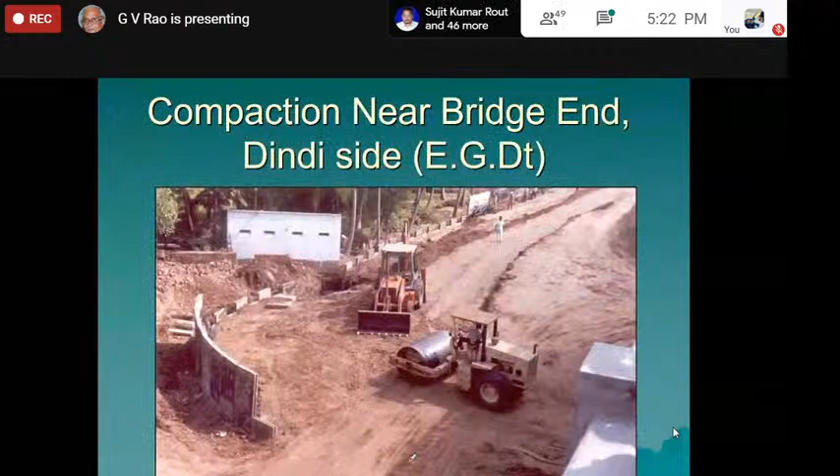This is how the construction is going on, and we can see rolling is not an issue, compaction is not an issue. All of it is going to be done like this. This is almost a finished structure, you can say. The slope is finished basically.

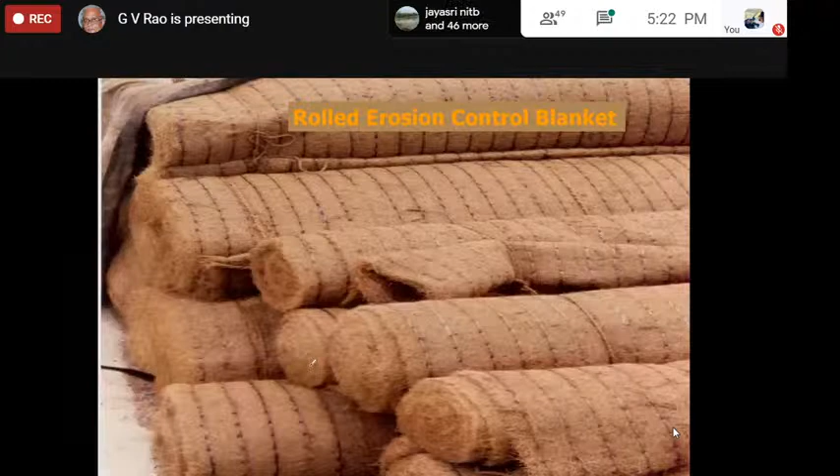Instead of placing stone pitching, we initially placed black cotton soil. The embankment soil is not black cotton soil, the embankment soil is silty sand. So the local black cotton soil is placed on this and weeded, then it was covered with the erosion control blanket, essentially coir, a very special product. Today, 3-4 companies in India make it. This is spread over and anchored by pins, and then we place the seedlings of turfing or grass, and slowly, within a month, the grass started growing, and by the beginning of monsoon, it is completely green.

And in fact, it looks so beautiful now too. This was open to traffic around 2000, 2000 or 2001 or so. So naturally, this was the first major work we did, and based on this concept, other things were also done. But the point is, this gives confidence that we can work on local soil, we can work on black cotton soils, we can make the geocells, which were done for the first time in the country, and along with that, we could also make a small wall within limited space.

Only this service road is available. You can see the plantation or the paddy fields adjacent to that now.

Another important point I want to mention is that during the course of construction, and even after 10 years, the total thickness of settlement was expected to be 1.47 meters. So this much settlement is going to occur at maximum height anyway. So that means the embankment is definitely settling, and you can see the patchwork also. So what is it we do?

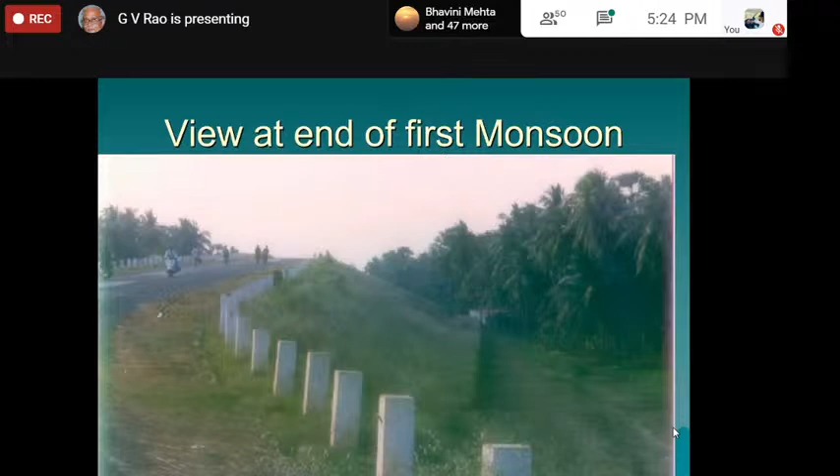We don't place the final finish layer on top. We only place the BM, bitumen macadam kind of thing. After 10 years, I think they place the DBM and then BC, that means dense bituminous macadam and bituminous concrete on this. Till then, naturally, they were doing some works for the pavement. Otherwise, the structure is perfectly intact. So that is one thing we have to see.

On the other side, also we can see picture now. It's beautiful. This is the abutment portion actually, and just behind this is obviously the river. And then of course vehicles stop here, but this becomes a picnic spot in good season. In Kartik Mas people do it.

So the advantage for this is going to be no excavation and minimal site preparation. No trips required for disposal of unsuitable export material. No difficulty working at or below the water table. So this is something going to be very important.

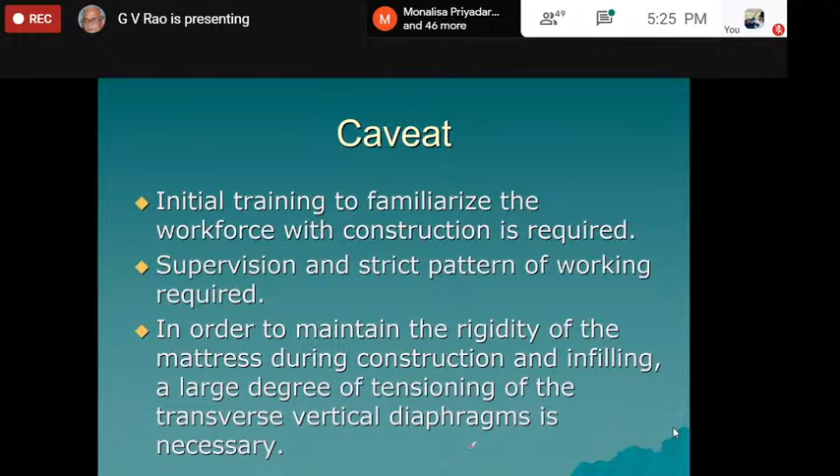The only thing which I remember is we require initial training to familiarize the workforce with construction, and supervision with a strict pattern of working is required. The engineer has to be there inside. And in order to maintain the rigidity of the mattress during construction and infilling, a large degree of tensioning of the transverse vertical diaphragms is necessary. We have to pull them up and then tie it to the pole. So that is there now.

So using this concept now, I will quickly run through this. At a site very nearby, upstream of the place I have shown you, both in the Vashistha and Gowthami River, there are two more bridges being built in those days. That means four abutments are constructed, four bridges are constructed on three approaches. They did a similar kind of thing, not the same kind of thing.

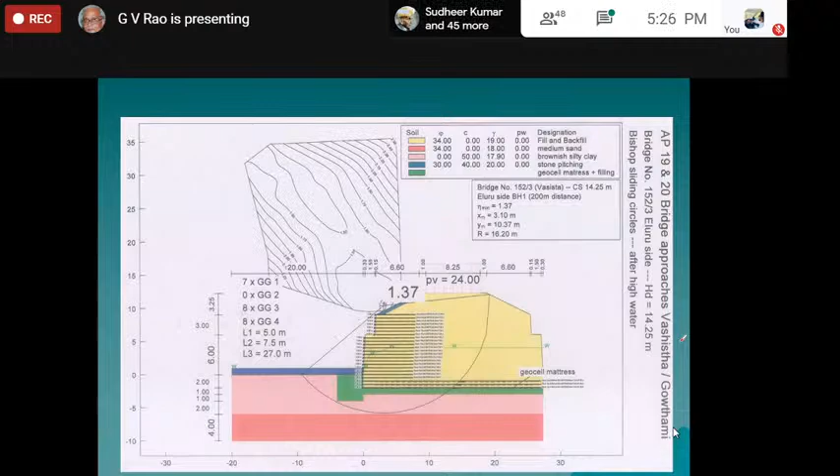You can see the ledges which are made because that will reduce the length required for the reinforcement. And you can see this is the reinforced zone. I will show you the reinforced zone, reinforced, you can say mattress, you can think of now, but done in a different way. I'll show you what that is.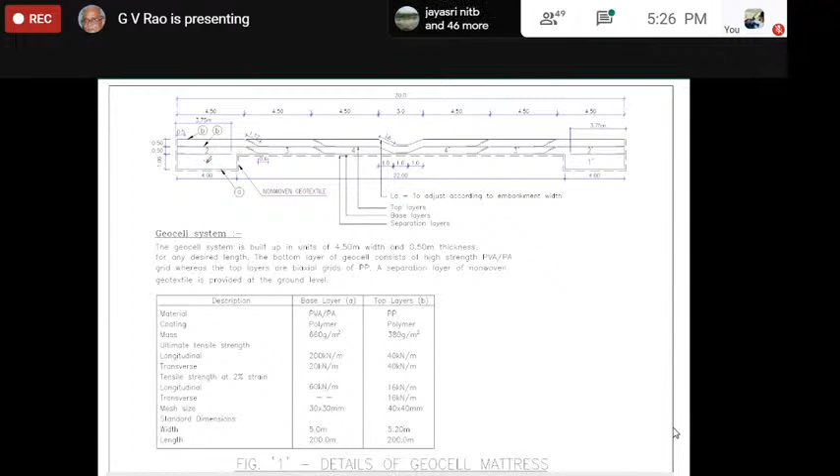You can see the geotextile placed again, same arrangement at both sides now, and geotextile being placed. This is being filled with sand, local sand, that means from the river. They place coarse sand, and a step by step procedure of construction is followed now. You can see the kind of strength of this. It could be 200 kN kind of strength, and in the other direction naturally it is 20 kN.

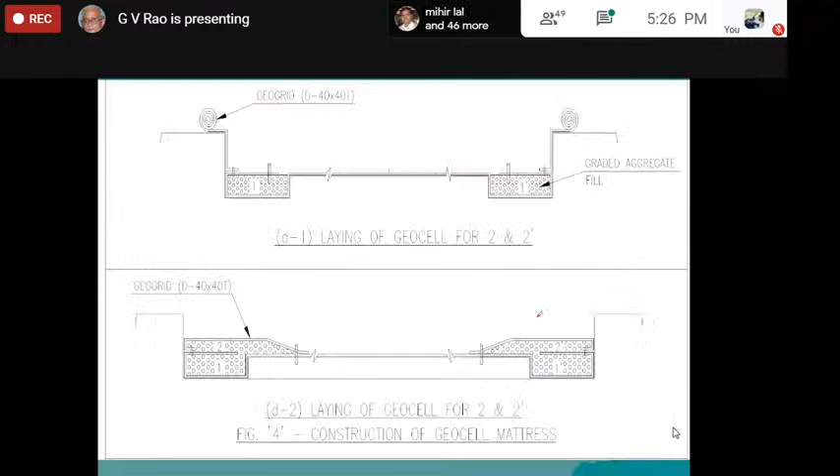And this is how the construction is done. Happily, the construction is undertaken by the L&T, the design vetting by IIT. And with all this, this construction was feasible. And at the end of the day, you can see this structure now.

This structure is being covered by using concrete planks. That means, unlike a normal wall wherein the reinforcement is tagged or connected to the panel, here these are separate from the vertical slope. These are only stanchions, I girders actually, and these panels are placed.

Okay, and you can see the curvature very beautifully. I mean, it's 20 years since construction, and the curvature is still there, and this is the main bridge portion now, and nothing happened to this, despite the settlements and all. Nothing happened to this entire thing.

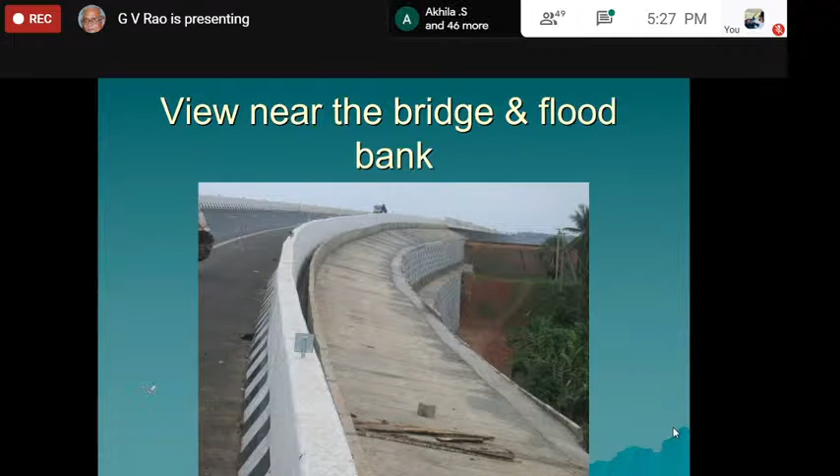Settlement probably occurred during construction only, and it was done by L&T as I mentioned. Using these concepts, locally people have started using this in both East Godavari and West Godavari for different distances now. Obviously, they don't have to come to IIT for this.

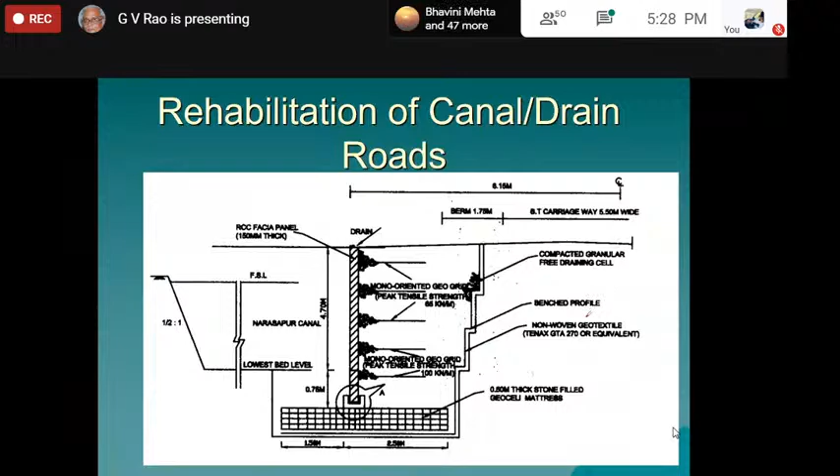Even on canal roads there are a lot of problems. They are building small height walls within the canal bank, like this, so that it prevents further damage to the road, which is again totally built on black soil. There are success stories built using the same concept. Naturally, our road width has increased now, and they are more stable.

Such structures have come up on MP Road in West Godavari near Martyr, and on Mandapeta Road in East Godavari district. So people have accepted that the technology works very well, and there is little damage to the main roads.

Summary of the entire thing: experience has been gained in design and construction of reinforced embankments on soft BC soils as per BS 8006. The point we are trying to make is that these structures have tolerated the settlements. That is the main thing.

If you think settlement is going to be important, naturally one option for you will be providing a drain, which means additional cost, and you have to wait for the consolidation to occur. So that is the main thing.

Whereas provision of reinforcement is almost like a stone column, at a much lower cost. With a stone column, naturally you get strength and hardly any settlement. But with this kind of geosynthetic improvement, it's not going to give you settlement reduction as such—yes, some reduction will be there, differential settlement will reduce. But we are not placing the geosynthetic mattress for reduction of settlement. It's only for allowing faster construction and ensuring uniformity in the structure while tolerating the settlement. These are the important points for us.

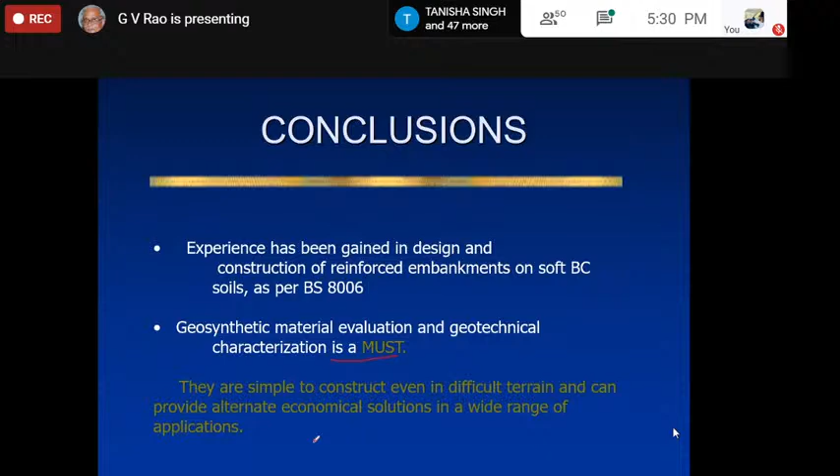This may not fall into the basic category of foundations, but we should remember that foundation doesn't mean only the foundation of a building—it is the foundation of all kinds of structures.

With the emphasis being given by the Government of India and state governments on infrastructure development, particularly road infrastructure, the plan of the central government is to use about 111 lakh crores in the next 4 years to build better infrastructure, and most of it is essentially on road infrastructure. So for road infrastructure, we can improve road condition, road improvement, and also the approaches and other things.

Some of these sites are greenfield sites. In a greenfield project, you may go through soft soils, swampy soils, or useless soils, and geosynthetics play a very important role in construction in those areas. It gives confidence, and probably in the next 2-3 months we'll be able to make out a code of practice also, giving us confidence in using these systems.

Lastly, the most important thing for all of us is that when we began the work of geosynthetics in '85, we had absolutely no inkling of manufacturing in the country. Today, almost all kinds of geosynthetics are being manufactured in the country. In fact, before COVID came, they were exporting extensively—even 40 to 60% of the production was being exported. So you have world-class materials already available in the country.

You can go and see them, you can get tested, and then you can also design using this now, either using the available Bureau of Indian Standards codes or using the Indian Road Congress codes. As I told you, we are going to shortly submit to the BIS our version of the geosynthetics for soil structures, in which this kind of application is also going to be mentioned.

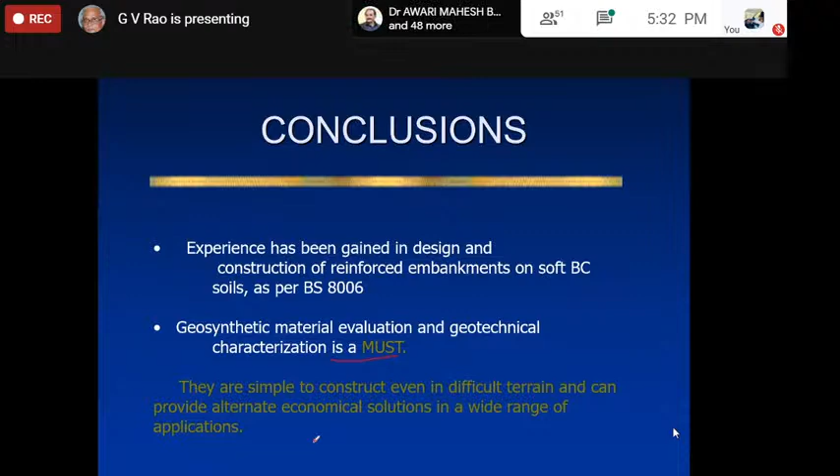And with that, it will give us confidence in trying to use it. So I wanted to show you the theory and some sense of why it works now, what are the limitations, and one application. We have many applications which I've done on such soft soils, wherein the criticality of construction and safety is always important. So I thought I'd just give you some overview of the entire thing.

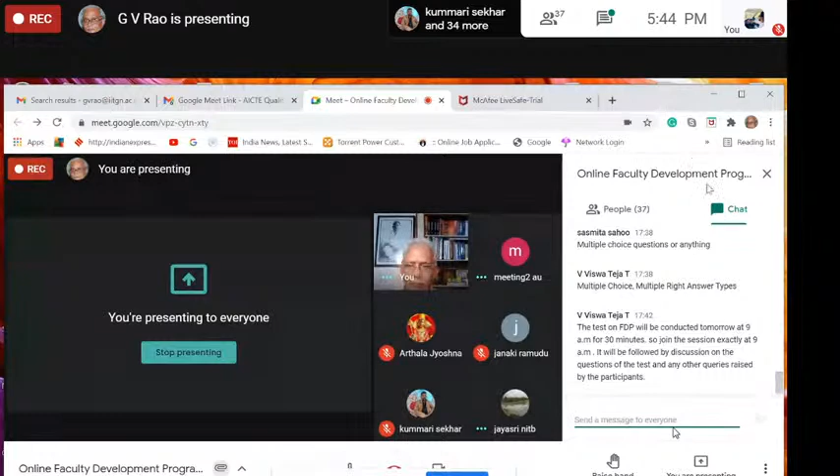Somebody wants to ask something? Sir, anybody else to add to Professor G.V. Rao's comments?

Yeah, JSP, you can also refer to Binquet and Lee, right? Their theory for estimating bearing capacity of footings, right, supported on reinforced soil beds, right, reinforced with layers of geogrid or high tensile strength, high stiffness geotextiles. So you can also go through the Binquet and Lee analysis. That enables you to theoretically estimate, right, the supporting strength of a reinforced soil bed.

He used the same theory and described the problem very effectively. Afterwards, they are also not following it. That is the point I'm saying. That is true, for the actual problem now, they are not necessarily following it. We have good theory. The Bible for foundation improvement is always, basically, Binquet and Lee. There is no doubt on that. In the early days, probably 85, 90, when we published the first book, he kindly wrote a chapter on my request, and that is still valid.